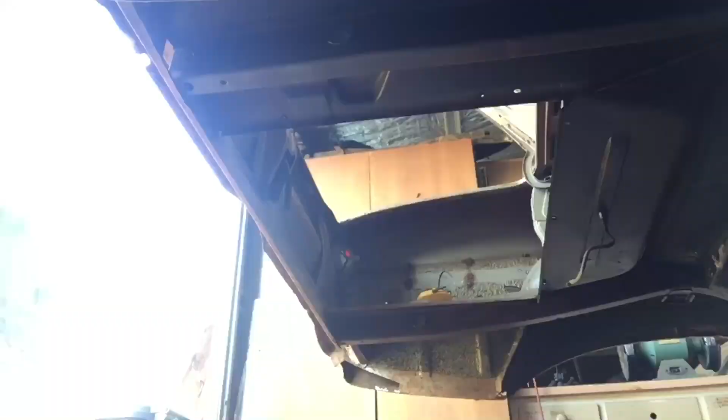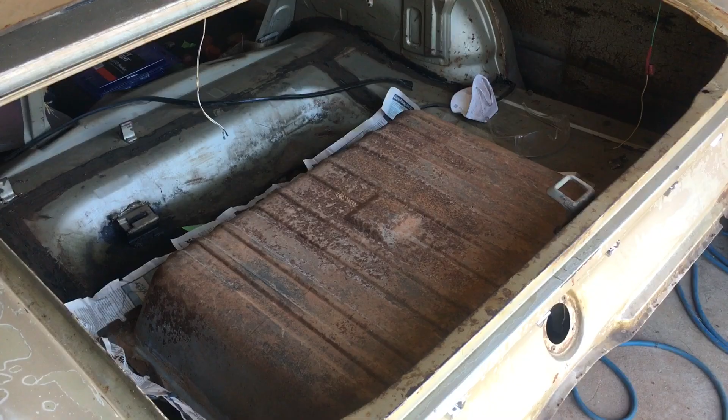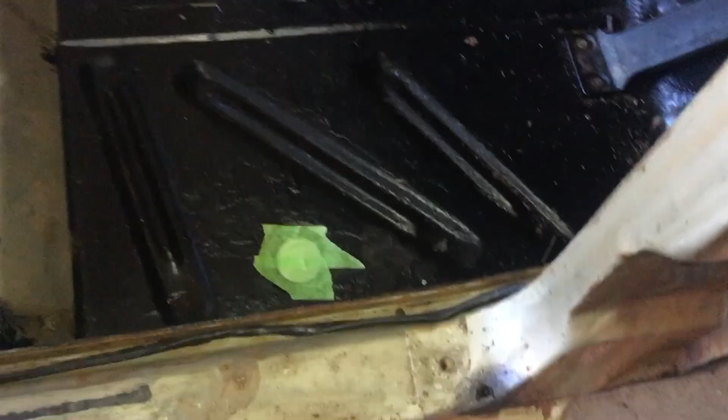As you saw, I just taped up the top of the fuel tank and reinstalled it upside down. It's just sitting in there, but that will stop all that body deadener spraying up into the boot area of the car. I've taped up the passenger side with some cardboard along the sill to prevent overspray, and taped up the transmission tunnel and inside the car, plus any drain holes. So I'm just about good to go.

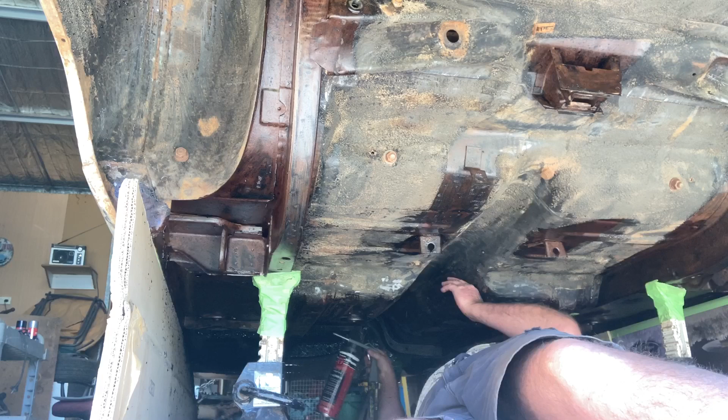Alright, I've used up the 2 cans of deadener and it's probably only done about half - messy shit. It probably hasn't even done half of it properly. There are a lot of bare spots still, so I may need another 3 cans. I thought 2 would be plenty, but obviously not. I still haven't finished up in here properly. You see up in there, it hasn't done up in there properly either. I'll go and buy 3 more cans and hopefully that'll do the job.

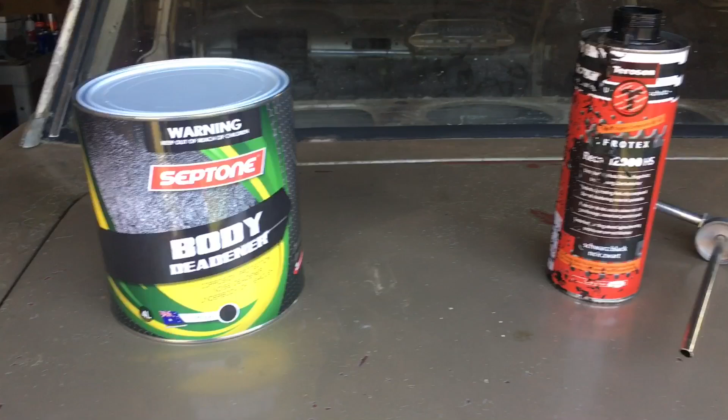I've already used the 2 bottles I bought to do underneath the car. I reckon it went probably a third of the way of spraying completely underneath the car. Because I want to get this done, I went and bought this - just brush on body deadener. Now I'm going to try thinning some of this and putting it into that bottle, and I'll try spraying it. If it doesn't do any good, I'll just brush it on.

Now there's a couple of spot welds in here that I'll drill out, and also where this hole is, where the bumper bar bracket goes, I'm going to cut through there, and probably a bit at the top as well, and just bend this in. That should give me good access to this flat section to make up that replacement panel and weld it in.

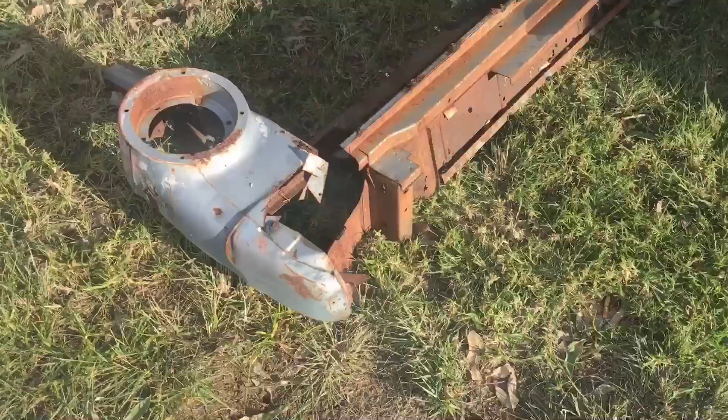Now this is a cut from an XP wagon, rear end obviously, and I reckon I can use that. It's a bit shorter than what I actually need, and also has a couple of rust holes in it, but surely it's easier than making up a new section, so I might try that.

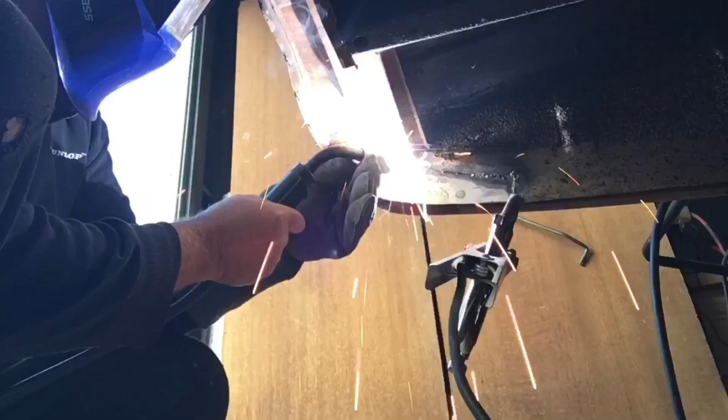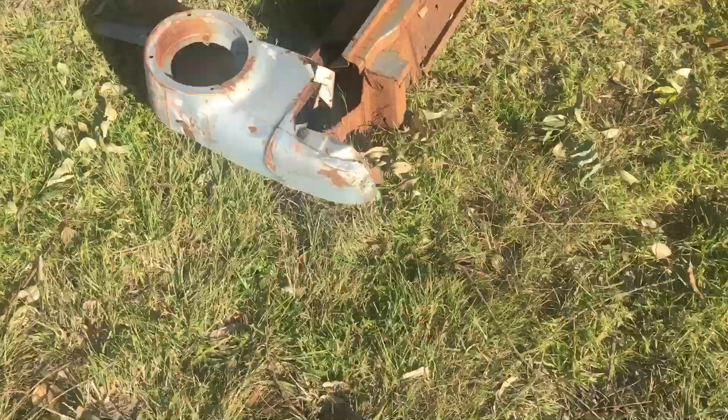Okay, changed my mind, I'm not going to use that. It's going to require too much repair. It's missing pieces, it has rust, it's the wrong size, and yeah, it's going to be a hodgepodge to use that section.

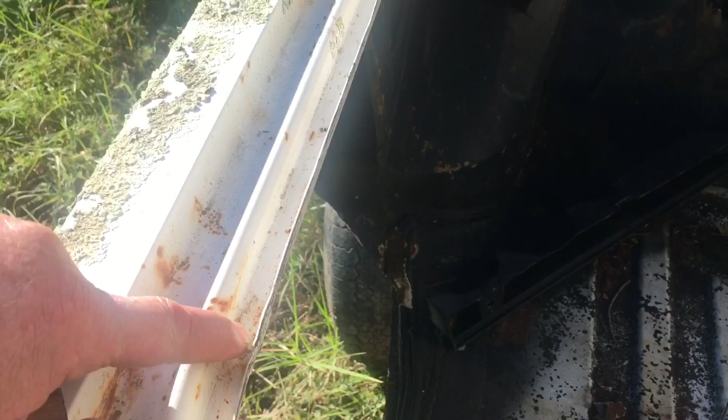So I went looking at this later model Falcon, 1992 XF. I've done a video about this car - I think I was just wrecking it or stripping it out in the video. Anyway, come around to this boot area section. Now it's got a channel right there and it's about the right size. The only problem I'm going to have is it's got that raised curve section right there. Now what I'm going to do with that, I'll have to flatten that out.

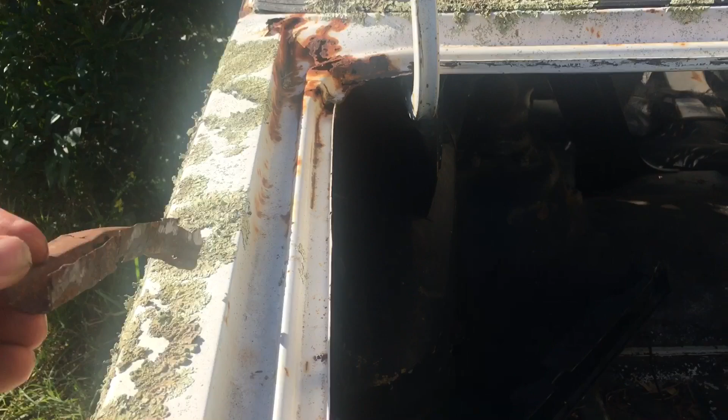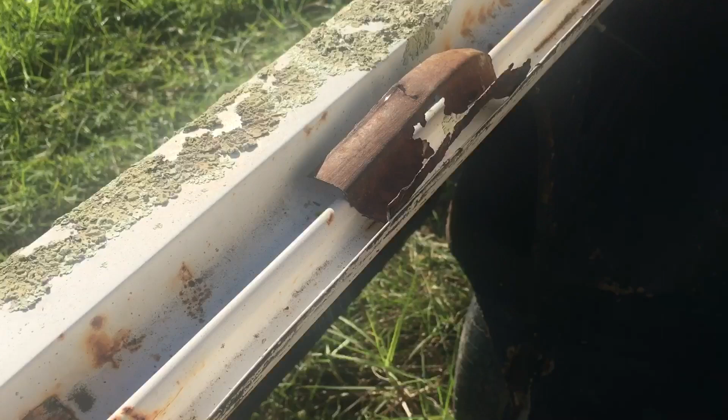Here's the piece I removed from the Futura, and you can see that's flat through there, so I'm going to have to flatten this out. The channel's pretty well close to the right size, so that's a good thing. Now another thing I'll have to do is get a curve to this channel - you can see the shape to that one there. So yeah, out with the grinder. I'll remove a section of this and see what I can do with it.

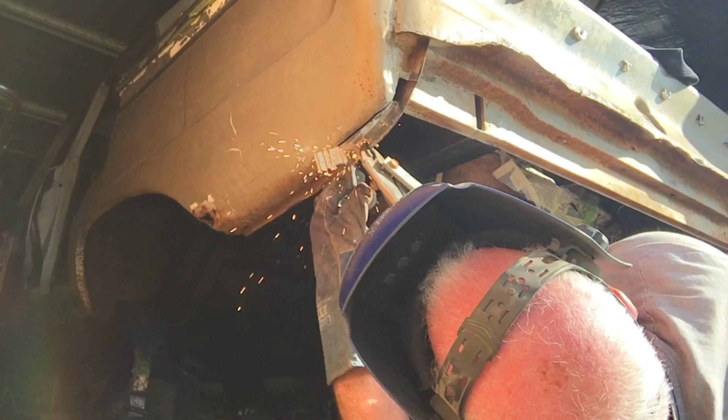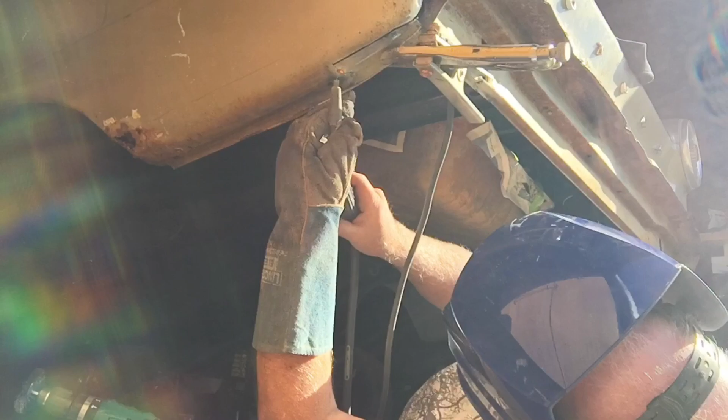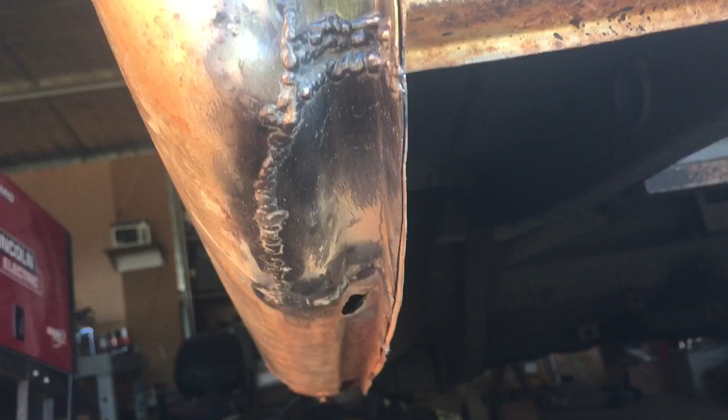Alright, just finished the repair patch on the back of the car here. I'll show you. Alright, I'll obviously need to clean it up, but yeah, it hasn't come up too bad. I had to put about 4 pie cuts through this back corner. There were some under here, but I welded them up off the car before I put that patch in - just made it a lot easier. So anyway, yeah, I'll sand that up, grind it up, and that's that section done.

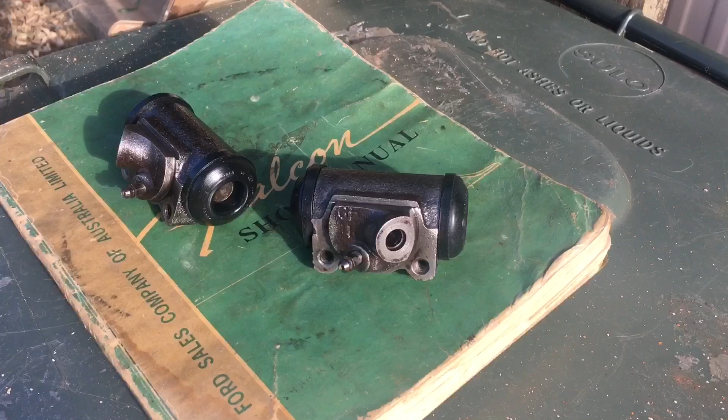I just spent an hour or so cleaning up these old front wheel cylinder parts, and yeah, now I'll get it all back together. I won't worry about filming it, I'll show you guys when I'm finished. Got those wheel cylinders put back together. They should go alright - if they don't, I'll just have to buy new ones. But I don't see any reason why they won't work okay.

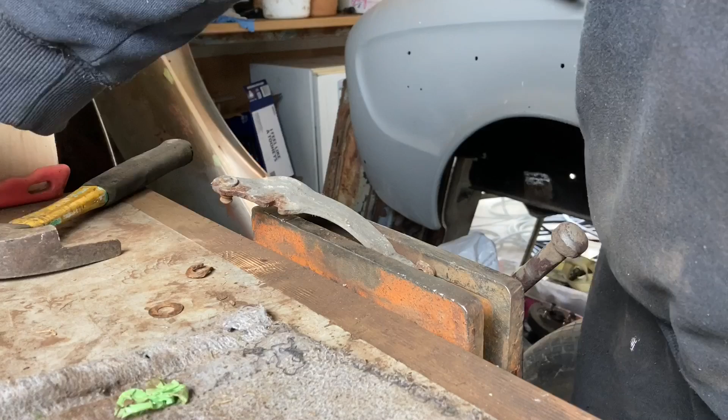Okay, I've got the front and the rear brake parts all cleaned up. Those shoe hold down springs and cups and whatnot, you saw how I cleaned those up. Now I have been in contact with a fella and he's got another spring to replace that broken one. Also he has a couple of these, and a few other parts as well.

Oh yeah, I'll go to the book. He's got that part right there for both front and rear brake drums, so that'll be good. That'll get me out of trouble there.

But yeah, all the back brake parts are cleaned up. Springs. These clips, I've got new ones of those. I don't know where I got them from. They were in this bag with all those adjusters, so I'm going to use them. It's too much - I mean, I could clean the old ones up, but I've got these new ones. I may as well use them.

So yeah, just waiting on those parts to turn up. In the meantime, we're going to clean the backing plates up and get all the brakes ready to be reassembled.

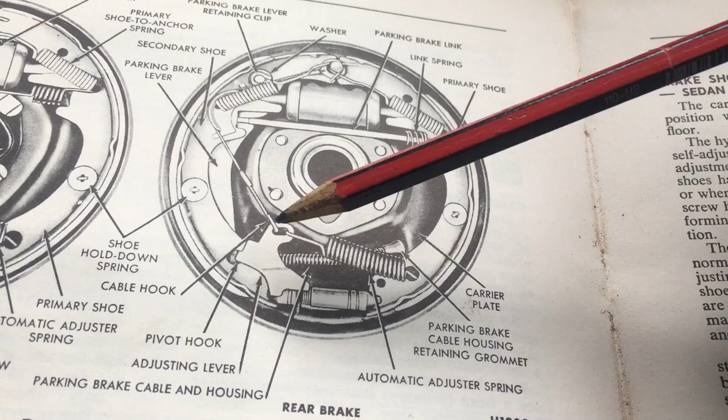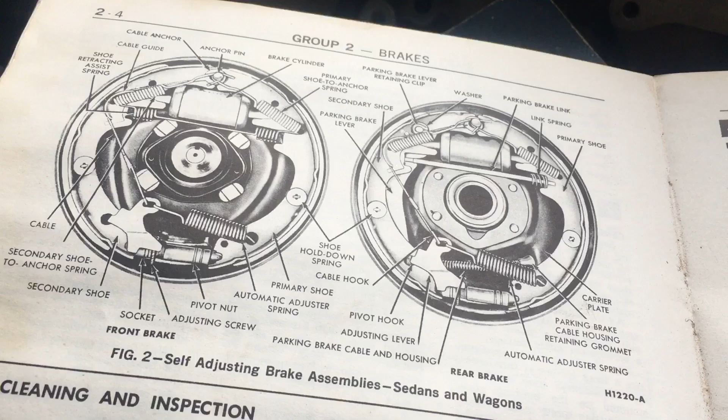Alright, yeah, I just remembered something else that I need to order, and that's this cable here. It goes from that self-adjuster bracket around to the top up here. Now I need 4 of those for the front and the rear, so I'll find somebody that has them and get hold of those.

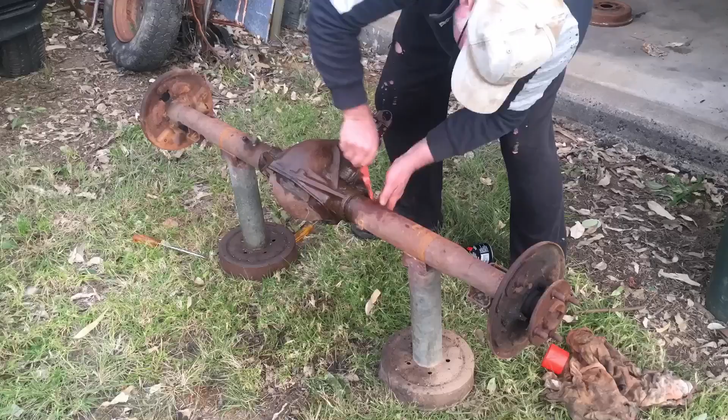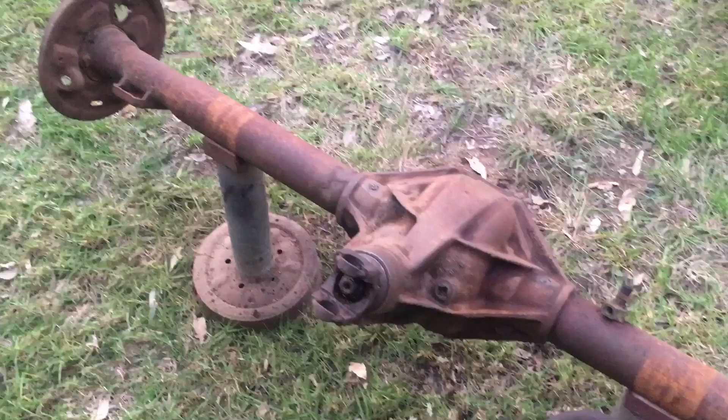Got the diff all cleaned up now. Almost ready for a paint. I will give it a bit more cleaning. It's still got dirt and crap in there, but that section there is done.

Going to remove that nut and fit this pinion seal, and just got to clean all that up as well.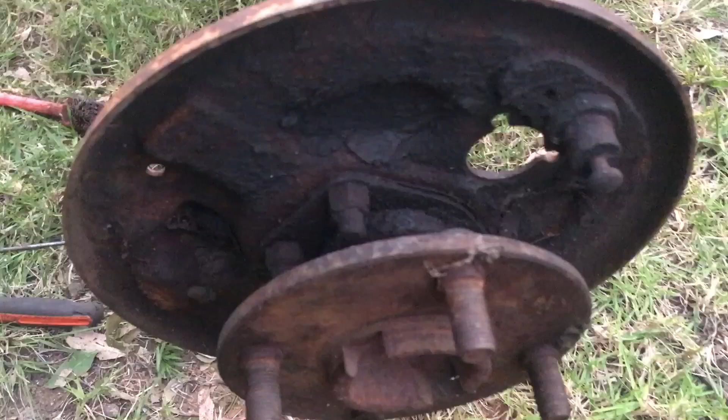I don't know if I'll remove the axles or not. I might not worry about it. I might just clean up around there as best I can, and once I do clean the whole diff up, I will give it a paint.

I'm going to remove the back of the diff. I just want to check inside, make sure everything's okay, make sure there's no metal pieces or whatever inside there. Give it a good clean out, and give me peace of mind anyway that it's okay.

Alright, it's raining today. I'm going to tidy up. I've just got crap everywhere. It makes such a mess when I'm working in this shed. I've got tools everywhere, over those benches over there, and that trolley. Empty beer cans, I don't know how they got there.

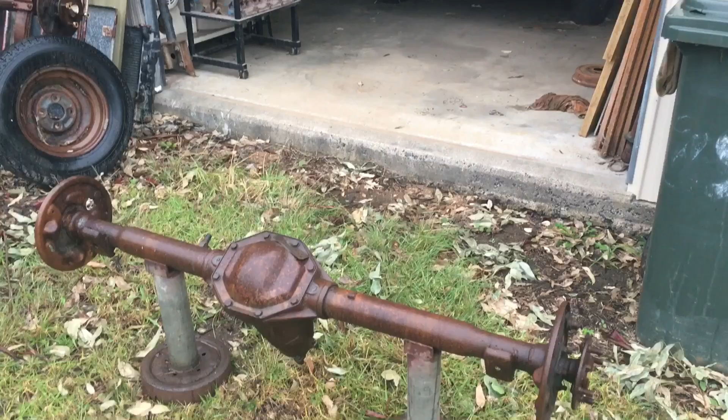And I also want to do a bit of work on this diff, so I want to do that seal. I'm going to move it into the shed just to get out of the weather. Hopefully I'll get that done today. So diff, and a tidy up.

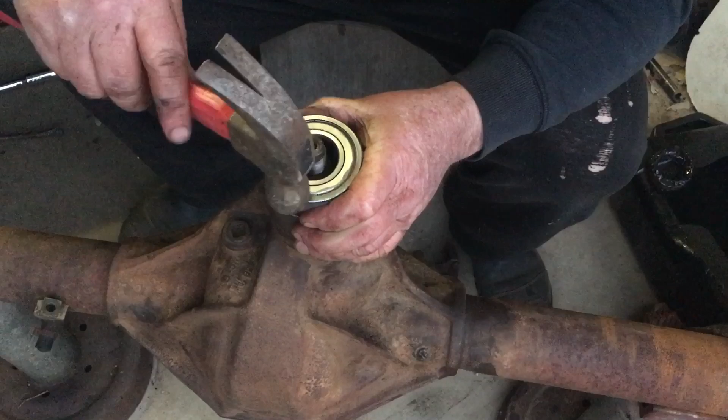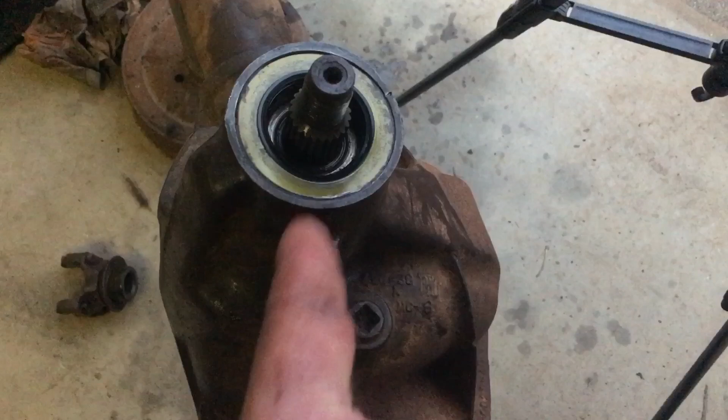Now I dare say I'm going to have to replace that seal again because I was in such a hurry. I have bent it, you probably see it where it's bent. Yeah, she's a bit out of shape. But you know what, I'm just going to leave it for the moment. They're cheap, I can get another one and I will replace it.

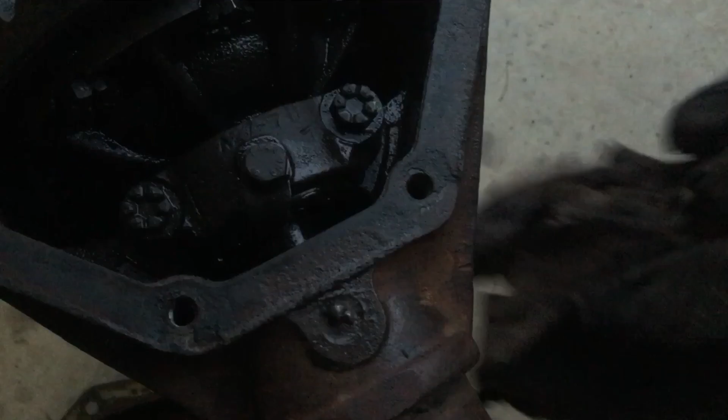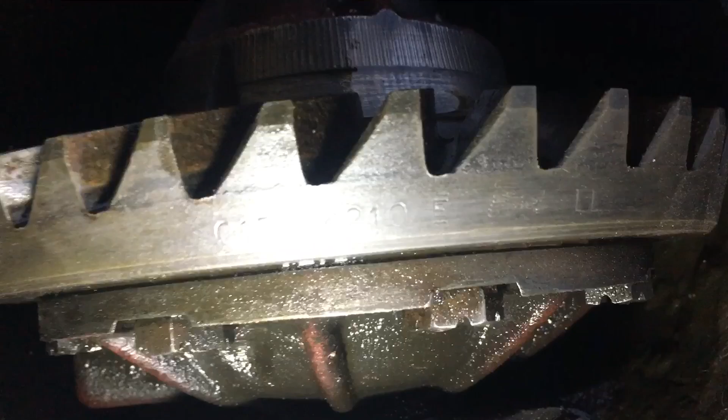Now I wanted to confirm that this was in fact a 3.2 to 1 ratio. Now it has that marking on it there, which I don't know what that means, but there's another one around here. I'll just turn a light on. Okay, there it is there. C1DW-4210-E.

Now I've looked that up and it is a 3.2 to 1 ratio, so that's good. I'm going to reinstall the back of that diff now, the cover. Won't worry about the yoke. I'll redo that seal and then I'll put that on.

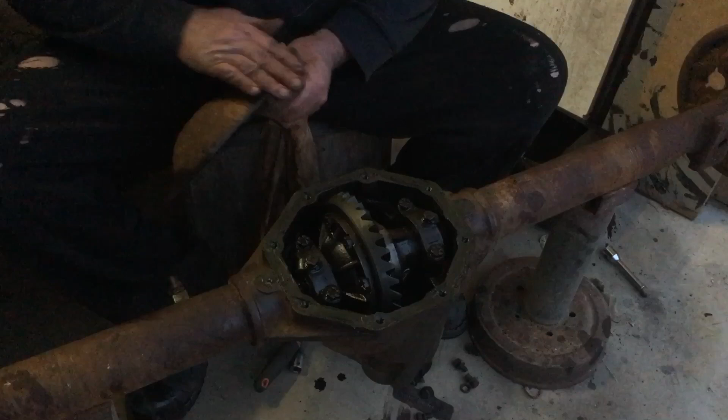Alright, I checked the inside of the diff and it all looks pretty good. There is wear, of course - it is a 60-year-old differential. I've cleaned it all up, cleaned this backing up, and I've also put some gasket sealer around it.